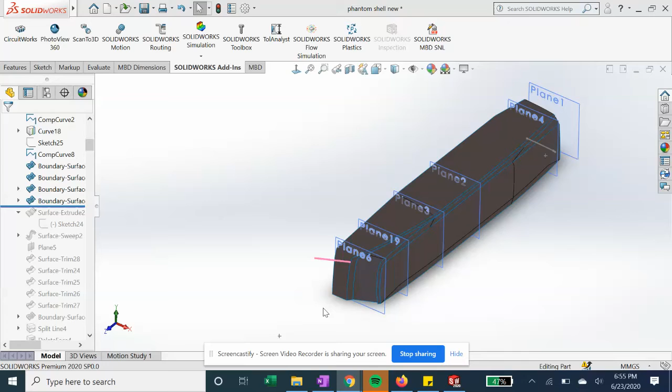Welcome back, boys and girls, and we're continuing our exploration of the shell design for the Rolls-Royce Phantom. Last time we just inserted this surface here. Now we're going to continue onward. So we have our planes set up again.

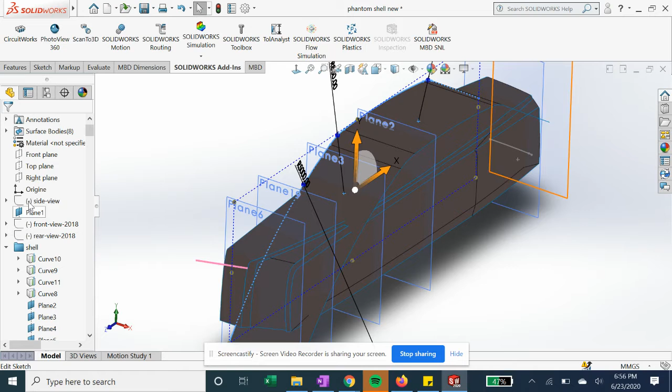This time we're going to do a sketch along the center side plane. Let's go ahead and turn on these again. On sketch 24, we'll take a look.

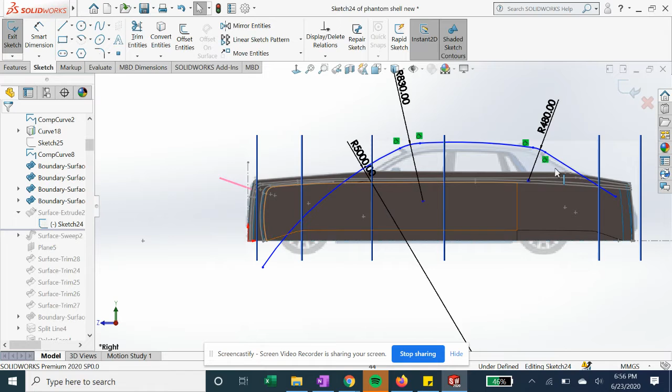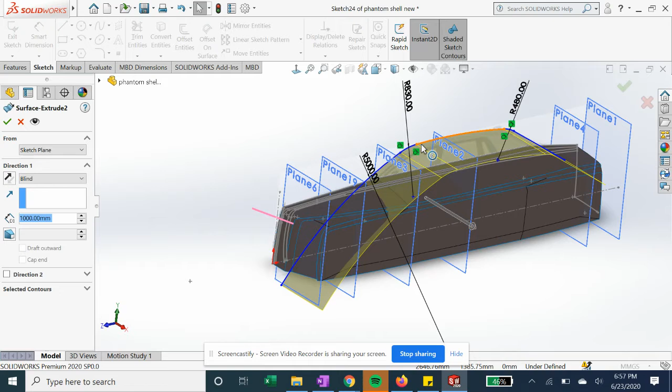We got this curve here following the roof and back slant of the blueprint, and we're going to extrude that out from the center. Like so, using a simple surface extrude and selecting that curve we just drew. We'll hit OK.

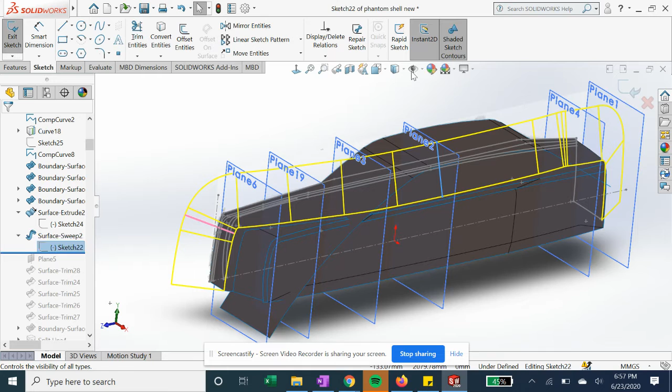Now we're going to do a surface sweep using, on plane 2, we have just a simple line like so, offset from the center.

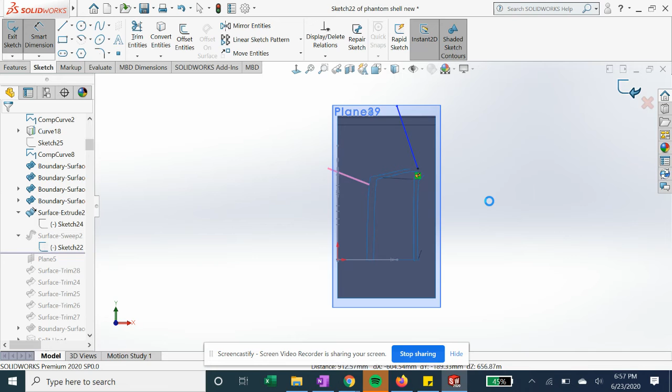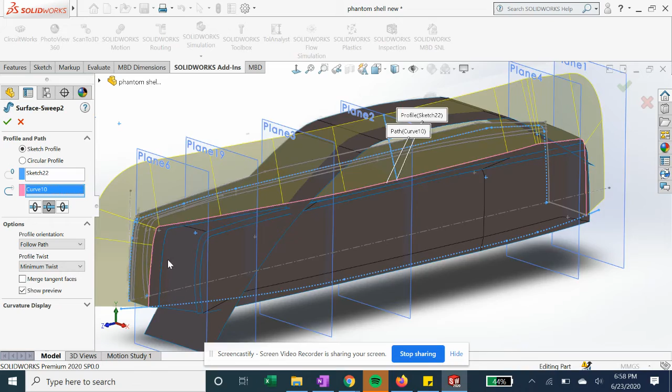And we're going to sweep that line across curve 10 here on our previous curve. Boom. We're going to choose our center option, bidirectional.

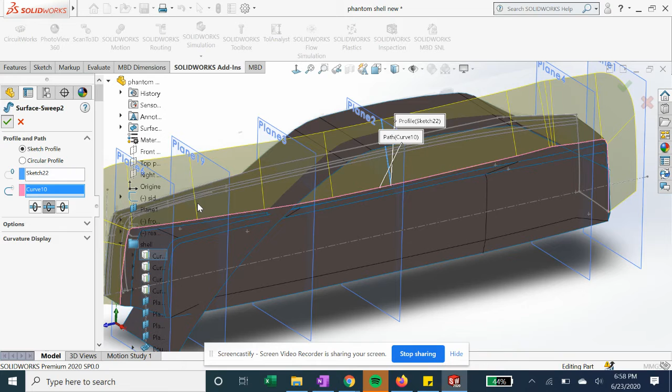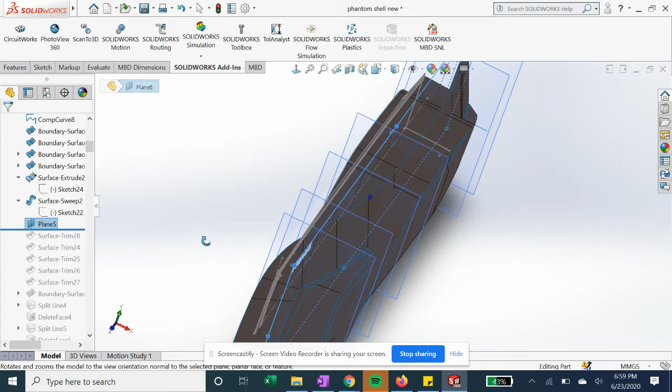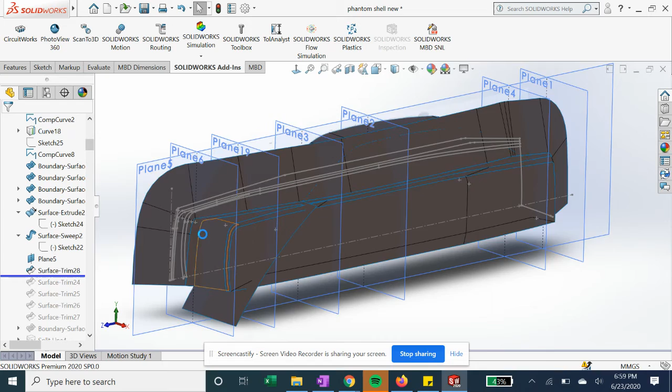Now that we have our surface sweep, we can continue on, create another plane. It's going to be offset from the side plane, or right plane rather, 300 mil. And we'll start using that.

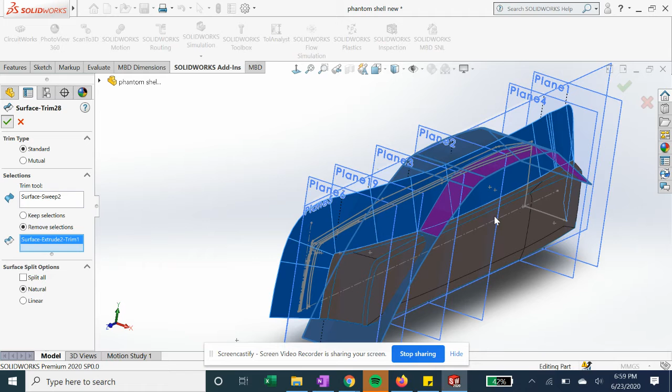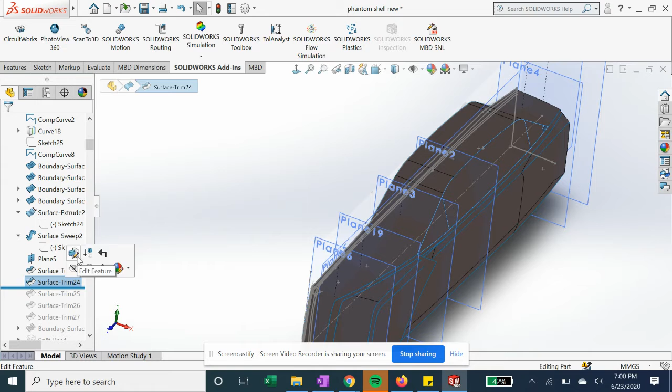We're going to do some surface trims. Trimming out some of this extruded surface we just did along our sweep. Now we're going to trim this surface sweep away. The purple we're going to remove.

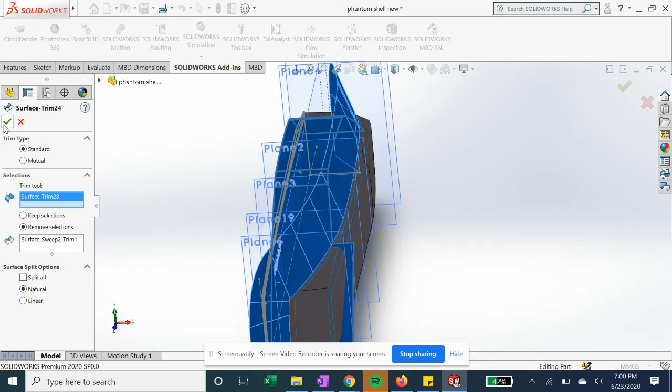Along our curve there. See what we have left.

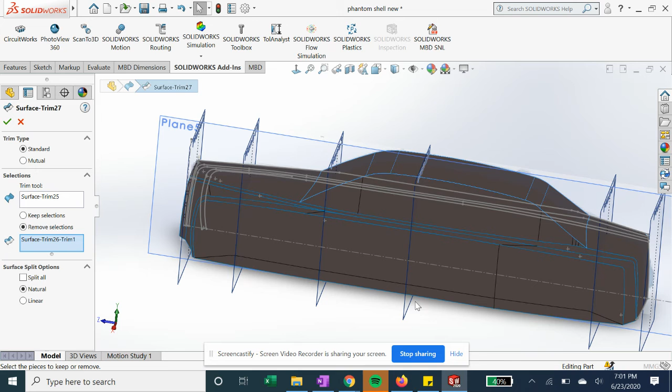And finally, this region here. So we got our roof curve and our outward surface swept curve, what's left of it, trimming all of it back.